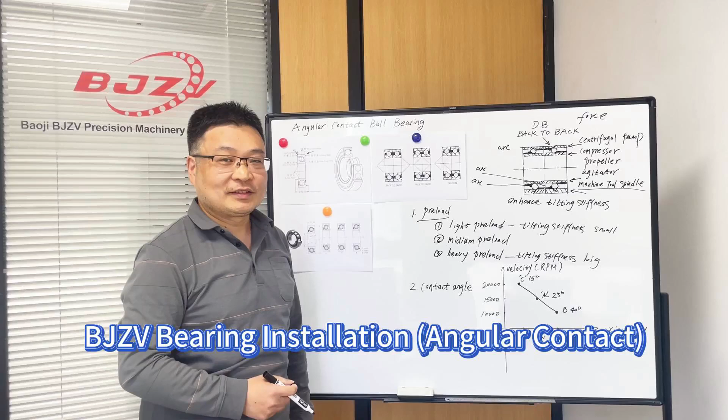Today I want to explain the angular contact ball bearing. Let us focus on the mounting arrangement of the angular contact ball bearings.

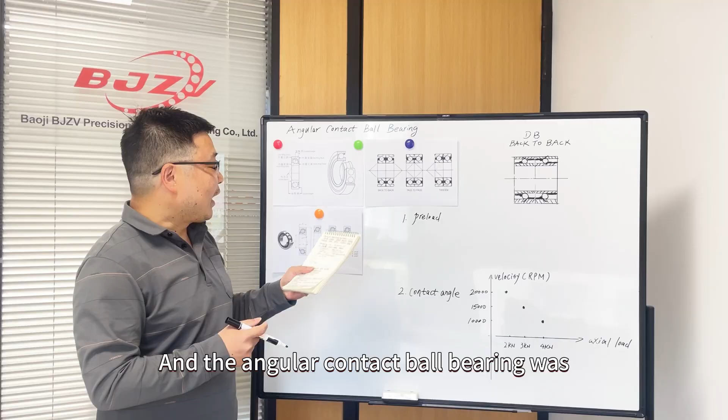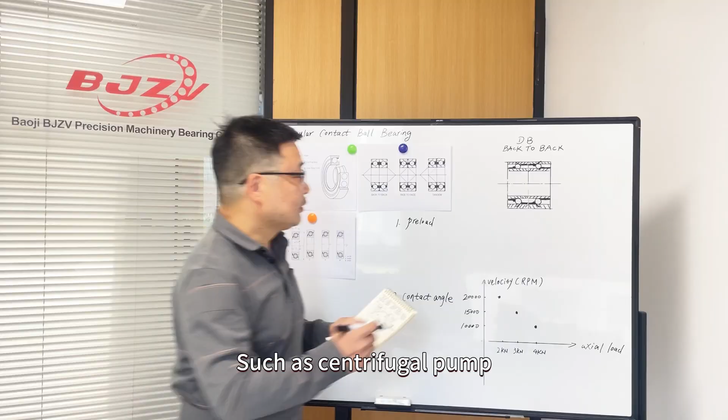The angular contact ball bearing is widely used in many industrial fields, such as centrifugal pumps, compressors, propellers, agitators, and machine tool spindles.

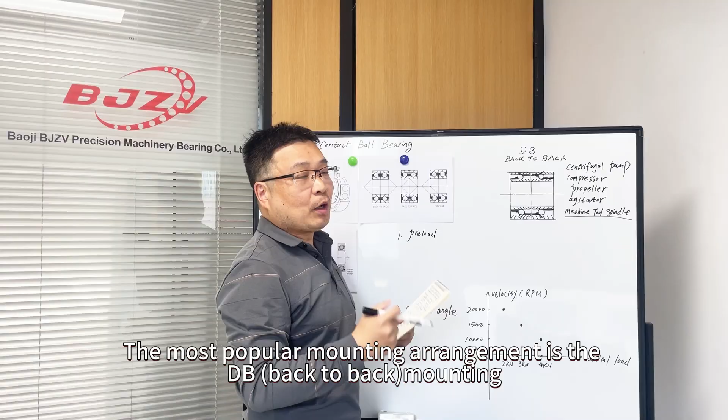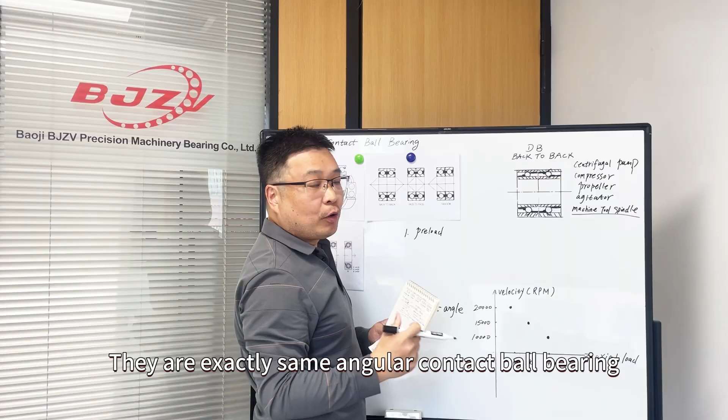The most popular mounting arrangement is DB, back-to-back mounting. There are two angular contact bearings, exactly the same model number. The angular contact ball bearing has two sides that are different: one side is thicker, the other side is thin.

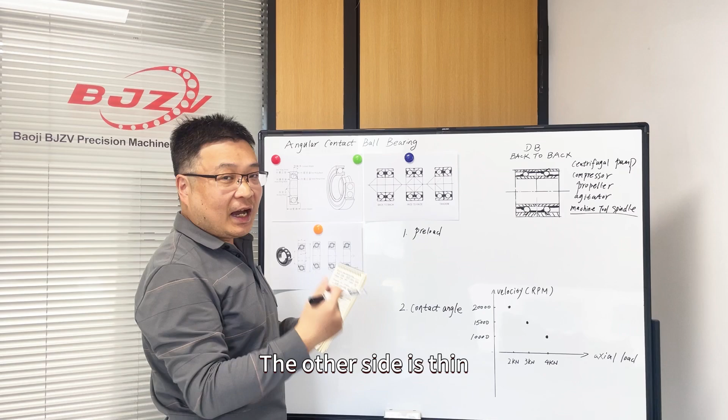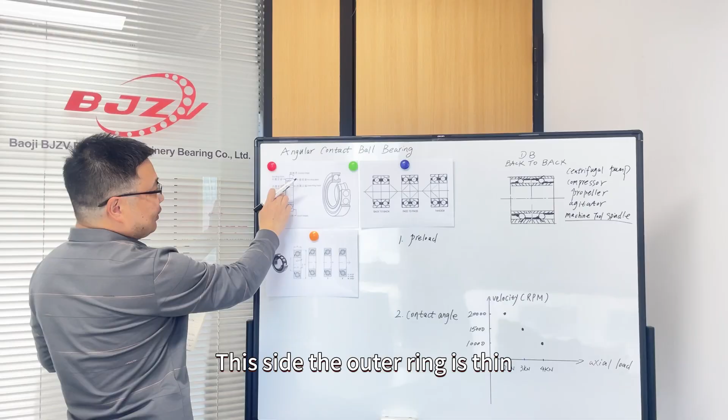Let us see this picture. This is the typical angular contact ball bearing, and you can see on this side the outer ring is thin, and on this side the outer ring is thicker.

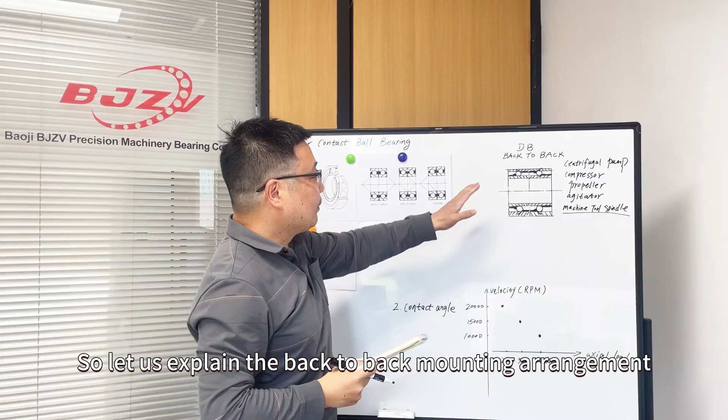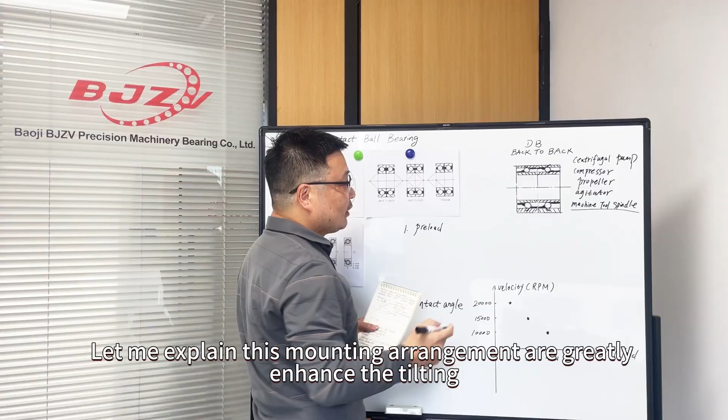So let us explain the back-to-back mounting arrangement. This is a very popular mounting arrangement. Why is it popular? Let me explain: this mounting arrangement greatly enhances the tilting stiffness.

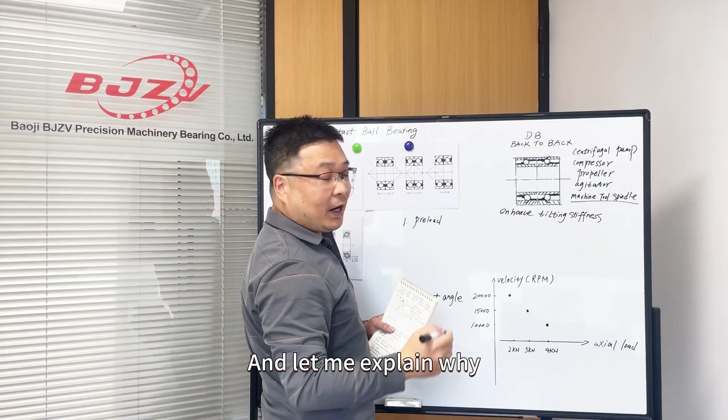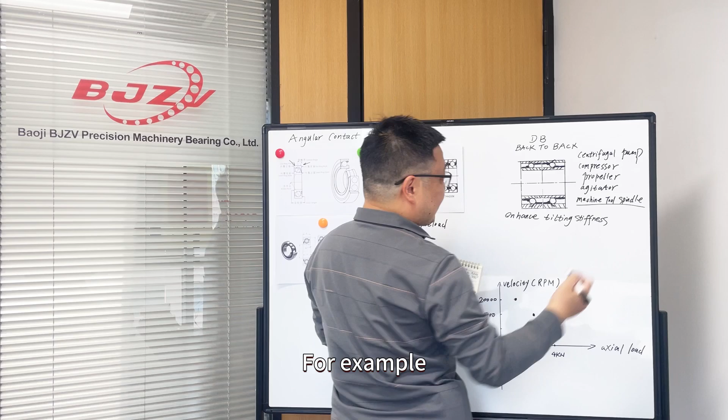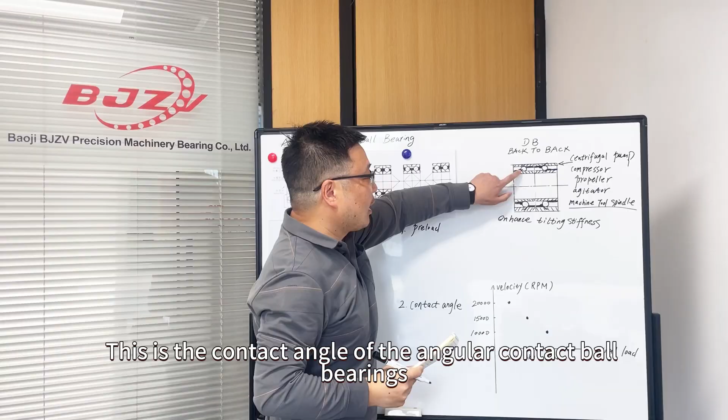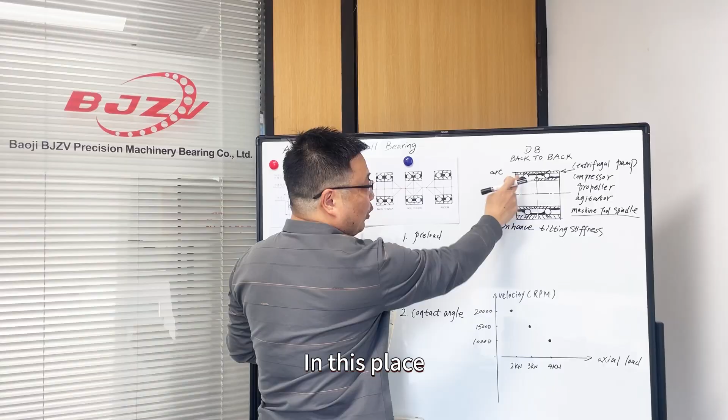When the bearing is mounted in a centrifugal pump or compressor, there are forces from many directions. For example, there is force from this direction, and because there is a contact angle here, this is the contact angle of the angular contact ball bearing. Because there is an arc and a contact angle here, this arc can resist the force from here.

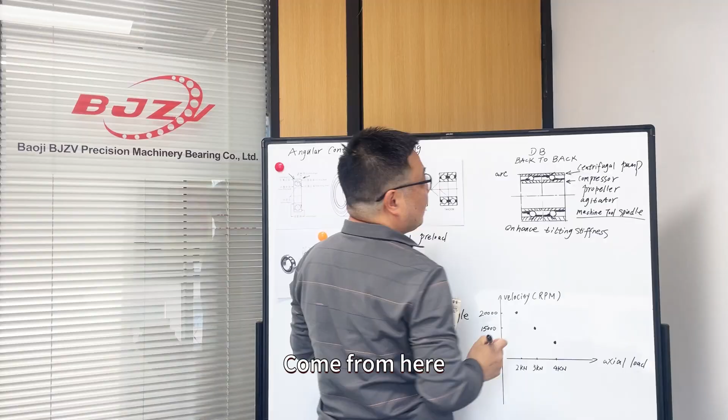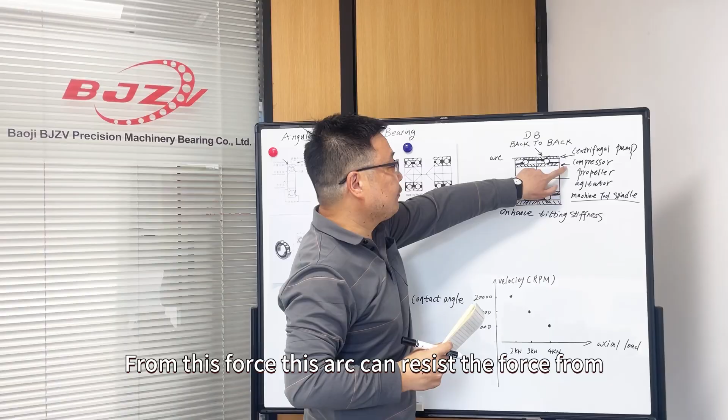For another example, if the force comes from here, then this arc, with its contact angle, can resist the force from this place.

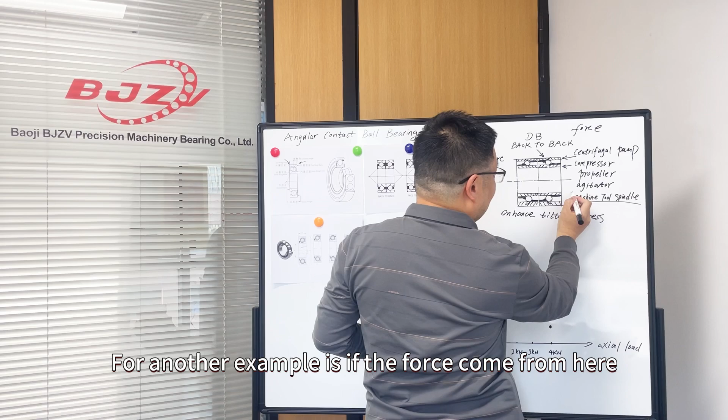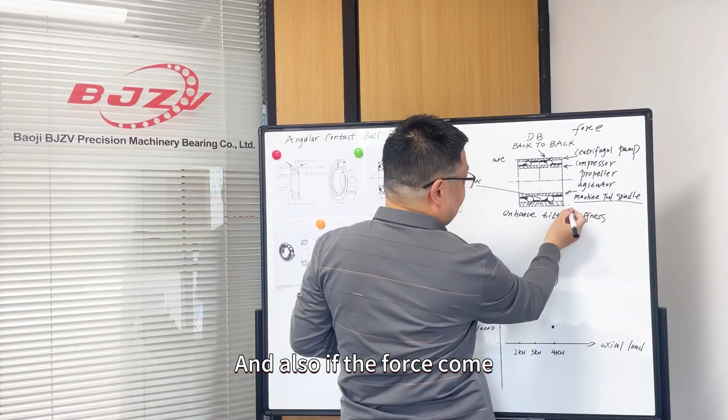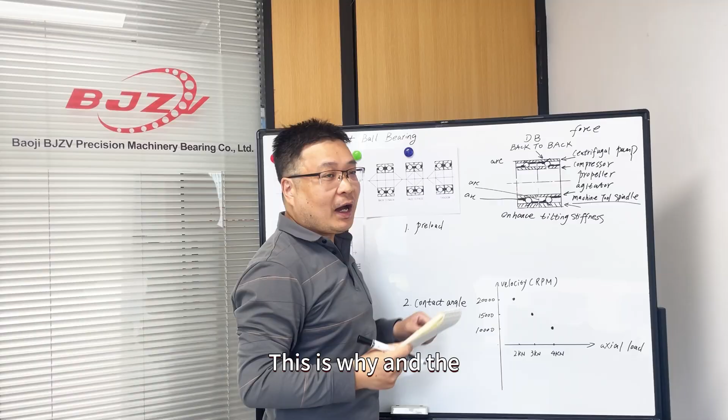For another example, if the force comes from here, this arc can resist it. And also if the force comes from here, this arc can resist the force from here. This is the theory of enhanced tilting stiffness of the angular contact ball bearing in the back-to-back mounting arrangement.

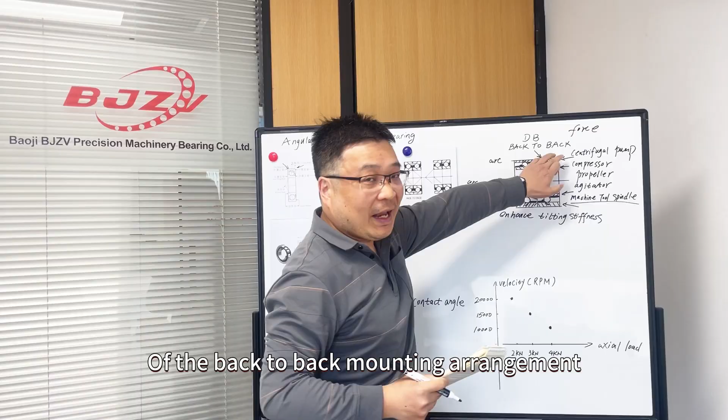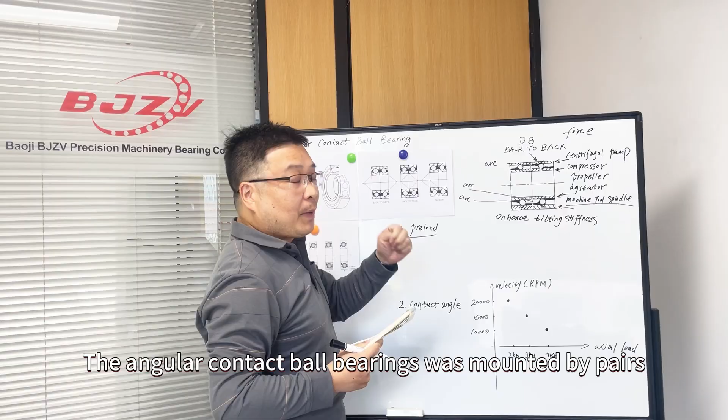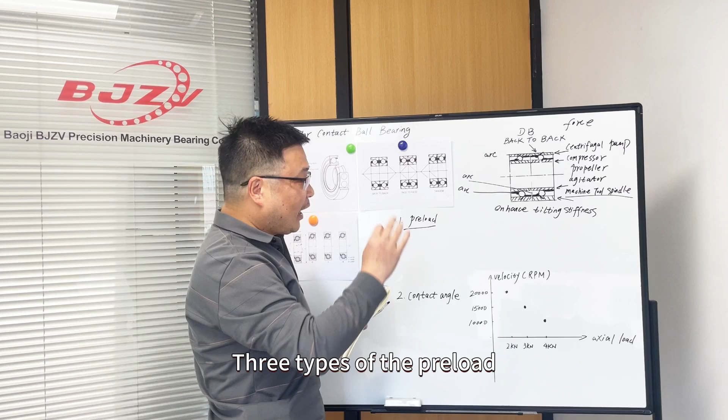For details, I want to explain the preload. Normally the angular contact ball bearings are mounted in pairs, and when mounting we should add a preload on the bearings. There are three types of preload: light preload, medium preload, and heavy preload.

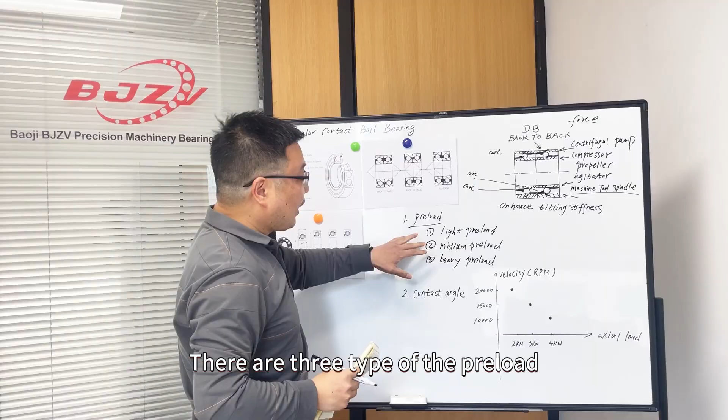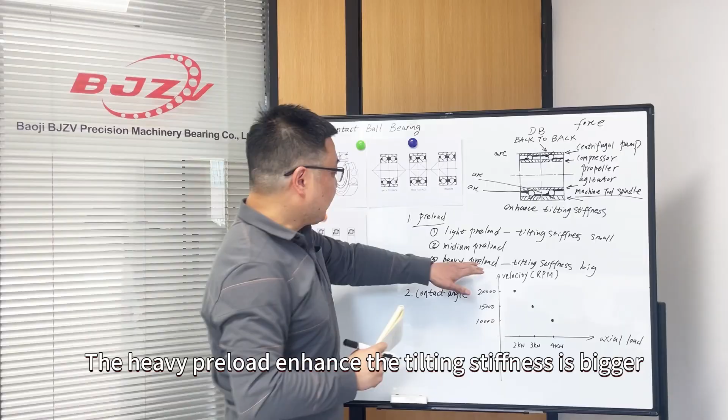With these three types of preload, the light preload enhances tilting stiffness only a small amount, while the heavy preload enhances tilting stiffness a lot.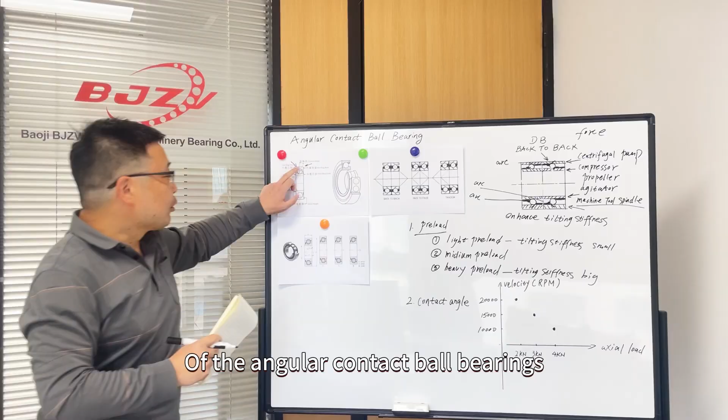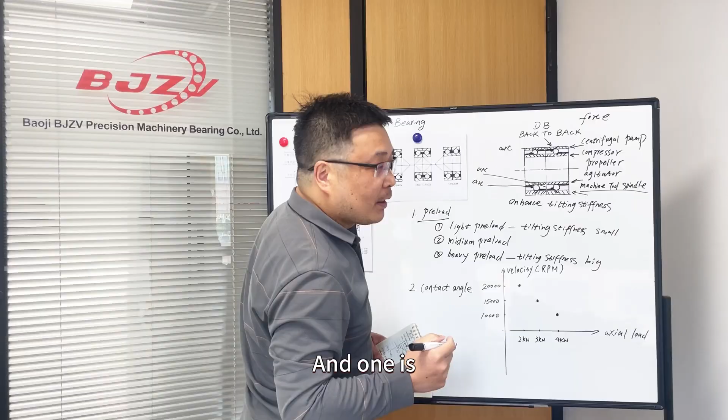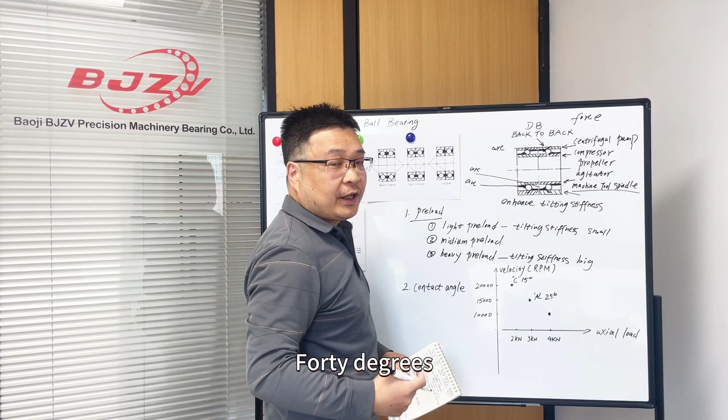Second, I want to discuss the contact angle of the angular contact ball bearings. Here is the contact angle. Normally there are three types: 15 degrees, 25 degrees, and 40 degrees, and there are big differences among the three types.

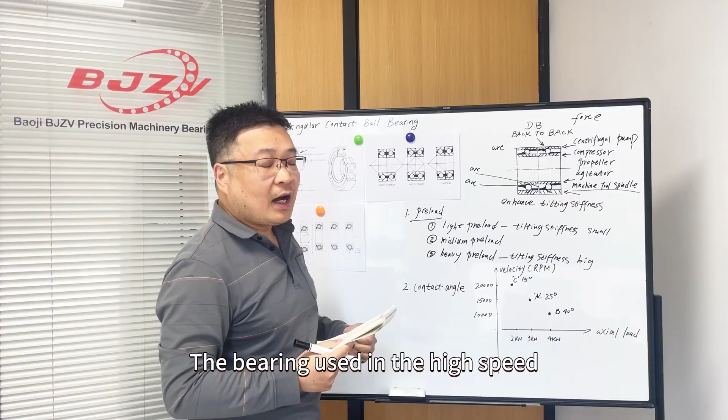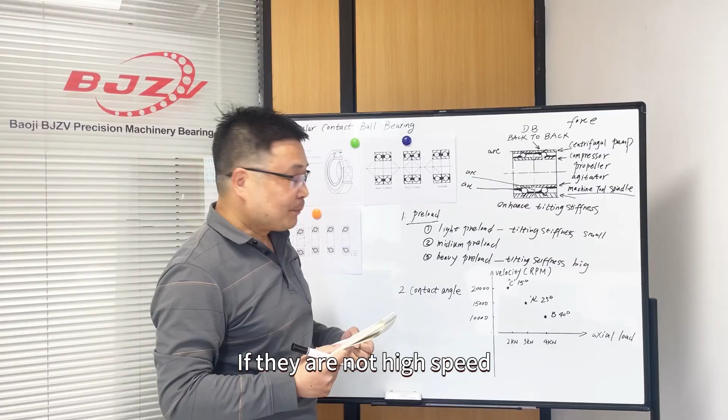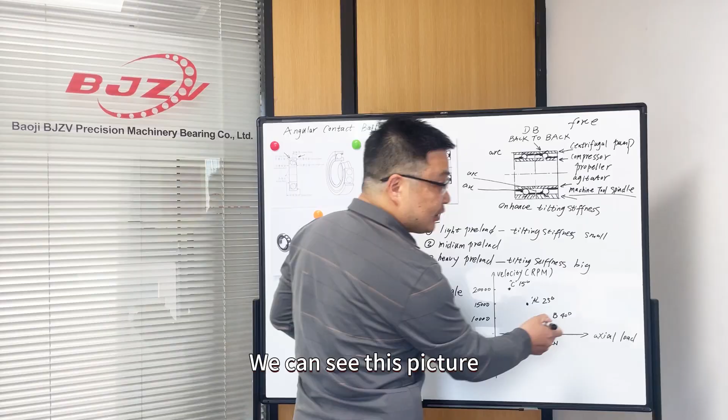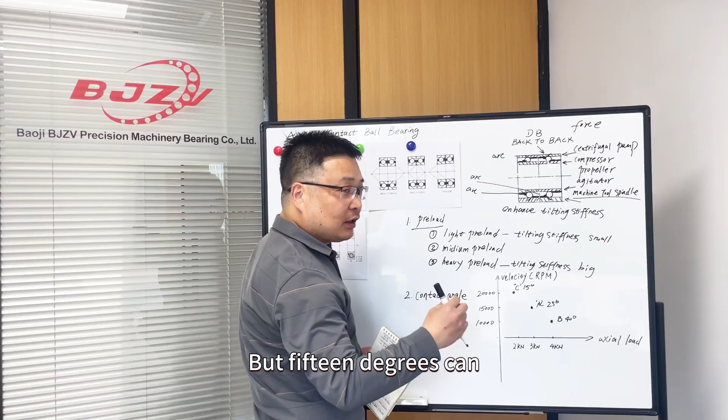If you want the bearing used at higher speed, we should use 15 degrees; if not high speed, we can use 40 degrees. But 40 degrees can resist a bigger axial load. We can see in this picture the 40 degrees can resist 4 kN axial load, but 15 degrees can resist only a small axial load.

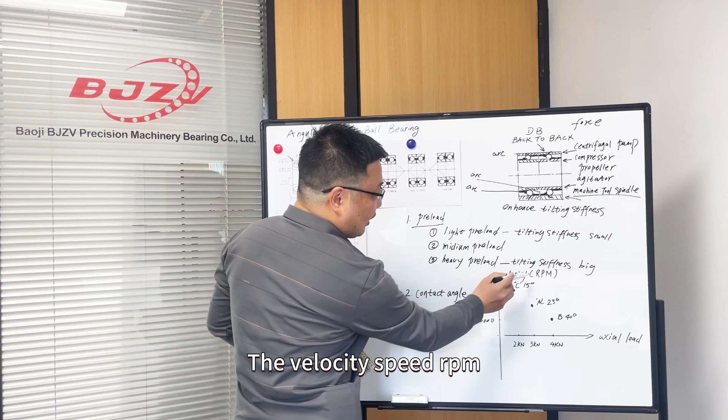So we can see clearly from this picture: this is the velocity, speed in RPM, and the 15 degree type can run at high speed, 20,000 RPM. So let me link the point.

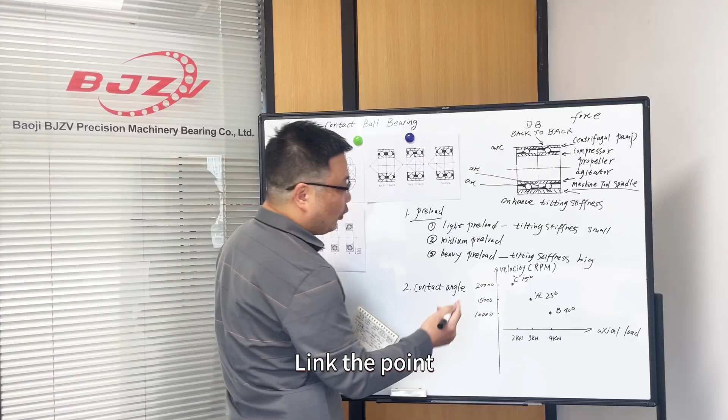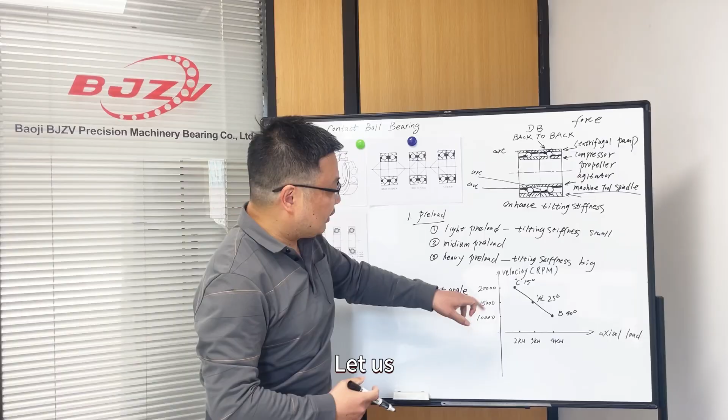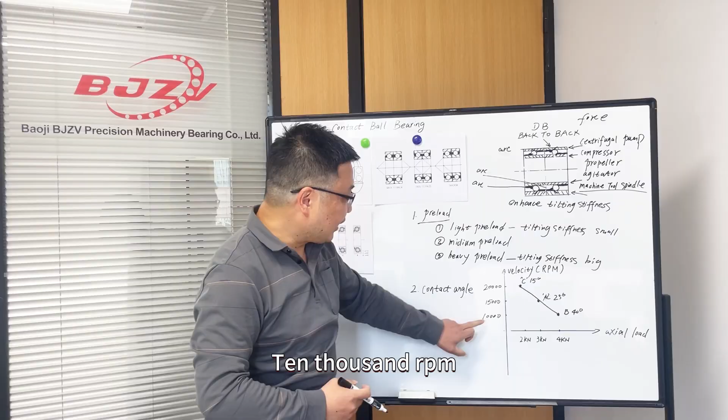We can see clearly: if the application is high speed with small axial load, let us select the 15 degree contact angle. If the speed is not so high, such as 10,000 RPM, and needs to resist higher axial load, then we select the 40 degree contact angle.